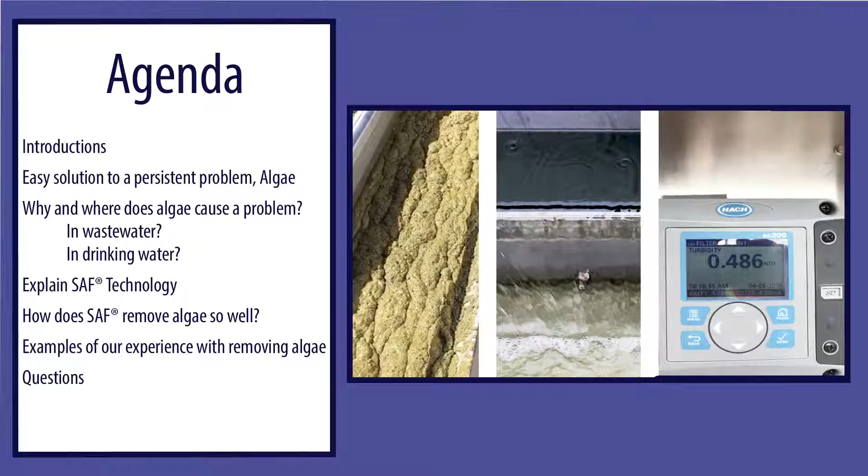But so our topic this morning is easy solution to a persistent problem, algae. And so what we're going to do this morning is talk about what is that problem, talk about in both drinking water as well as wastewater plants, what kind of problems that we've seen. And of course, as John said, if you've got any questions about that or have specific problems you've encountered with algae, please send that to us through the chat feature.

And then after we define that, we're going to be talking about SAF technology, how it works. And then we're going to be talking about SAF as applied to algae. And we'll be going through some case studies and hopefully have some informative things to share with you. So, John, let's talk about algae.

Okay. As I said, both wastewater and drinking water plants tend to struggle with algae. And often I'm at conferences, as I'm sure you probably are as well, and this seems to be a recurring topic. It's creating problems with other technologies that are out there. And I always, at those conferences, wish I could stand up and tell people about SAF. So I guess now's our opportunity. So let's first talk about just what are those problems? What have you seen, John?

Well, algae tends to float and sink, so in the use of clarifiers, it can be problematic. So, mostly on the municipal side, even on the industrial side, it has to do with treating the water, treating the BOD. On the municipal side, the water is often in a holding pond after it's been treated. It has some residence time there, and they're waiting to reclaim it.

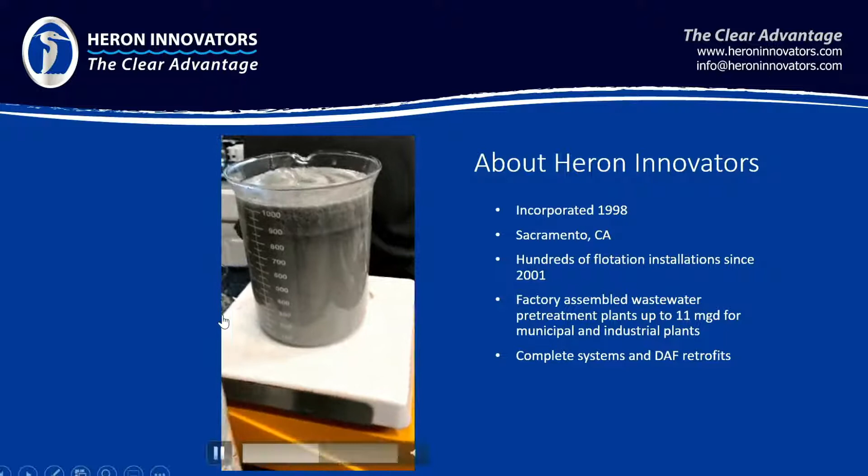So what you see is there's a charged micro froth, charged microbubble froth being injected, and those bubbles are attaching to the solids, getting a very high removal rate, very fast rise rate, and a very stable float. And that caught our attention. I had both the lab manager as well as the... and I think he said, wow, that was really something. And he started looking into SAF.

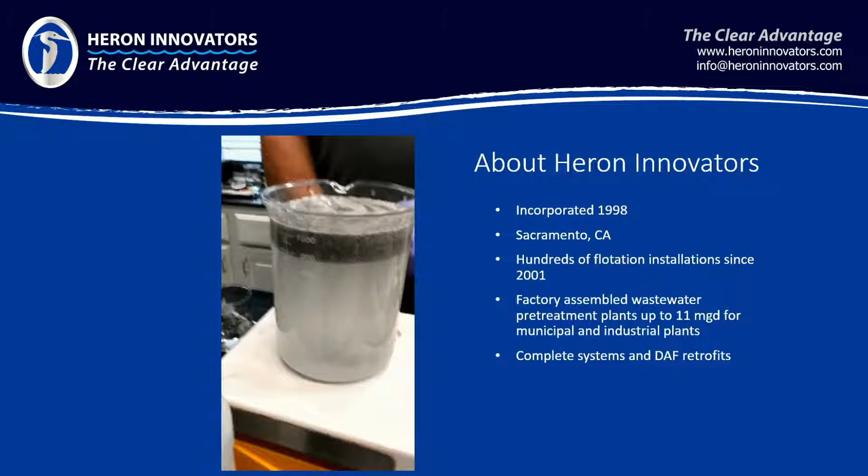In fact, visited 3 installations, Missouri, I think we went to Dodge City, Kansas, and we also went out to Fairfield, California, where SAF was installed, and really were impressed with what we saw in that particular plant. In fact, now owns 9 SAF systems. They've converted most of their DAFs over to SAF now. That's a big part of Heron's business, is converting DAFs to SAF, but they also own a lot of new SAF systems too, which we may get into a little bit more here.

So let's start defining how SAF actually works. You know, at first glance, this is just another flotation technology. It doesn't appear to be a whole lot different than dissolved air flotation. If you were walking into a room and looked at it, you wouldn't know that you're really seeing a different technology, because they're both flotation. You've got a big vessel sitting here where you're floating solids out of water. So I'm going to start off defining. When you really dig into it, it's a very different technology.

Recirculation system typically, where you're drawing from the underflow, and that's theoretically where the water is cleaner. So you're pulling from the underflow with a recirc pump, pushing against back pressure, injecting compressed air. Under pressure, air dissolves in water up to the saturation point. What that saturation point is, is basic physics. The temperature, pressure, all that's going to affect how much air you can squeeze into that water.

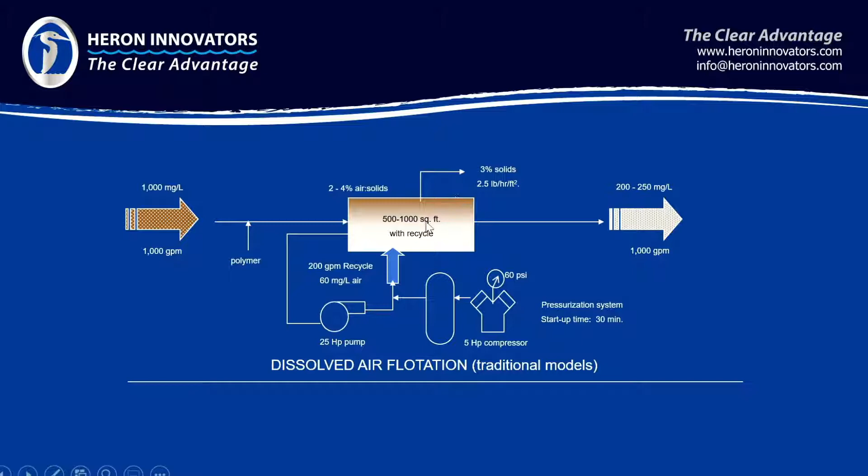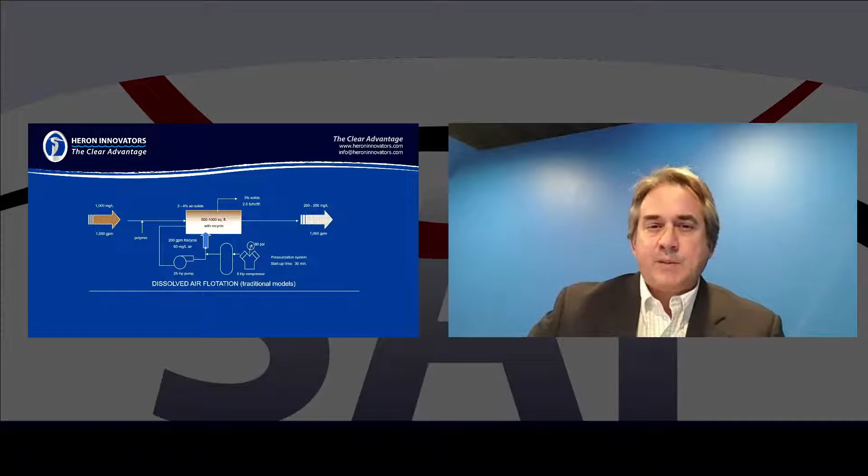The technology's actually been around for over 100 years. Of course, over that time, there's different ways of sparging in more air. They're all creating bubbles in the water. There's really nothing special about that bubble. And I'm going to ask John here in a minute to talk about those bubbles. What makes SAF bubbles so different from DAF bubbles? In fact, that froth. So what DAF doesn't... it

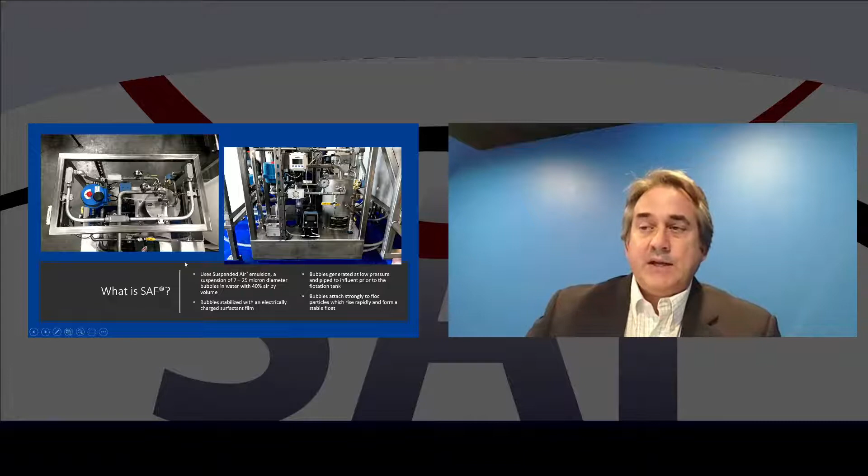Instead of making bubbles the way we just described, it's going to create a charged microbubble froth with a froth generator. And this sits somewhere in the vicinity of the flotation cell. It's a small unit, about 4x4, 4x6 foot footprint, depending on the size of the application. But a really small unit sitting somewhere nearby, and this froth is going to be 40% air by volume. With the DAF, we're talking about 2 to 4% air at most.

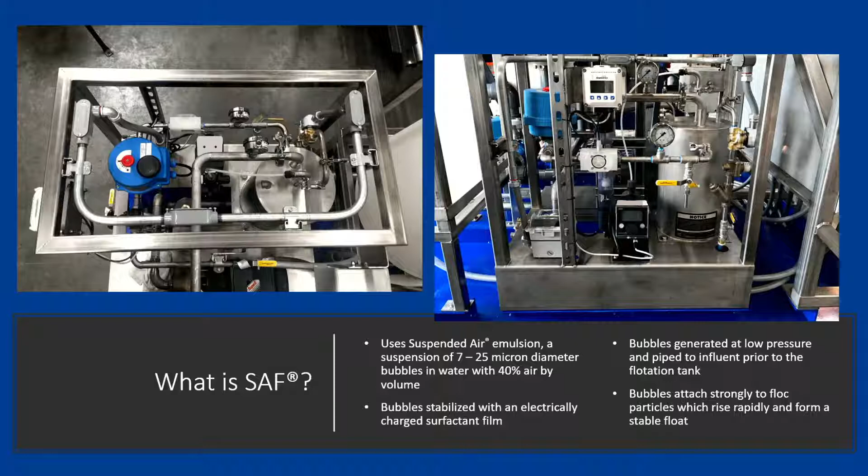But this is 40% air, and these bubbles are 7 to 25 microns in size, which is a much smaller bubble. They resist coalescing, but these bubbles, as I said, are much different than what DAF bubbles are. And so, John, why don't you talk about that a little bit? What makes SAF bubbles so much different than DAF bubbles?

Well, SAF bubbles were actually patented in the 70s, called Aphrons. They're used often in the mining industry. The whole process, in the 70s when it was patented, was supposed to scale into this DAF application. That's actually what we brought to the table. In the 90s we learned how to scale this. The original inventors actually all passed before the technology was ever used.

The bubble itself is a double-walled surfactant bubble, and it doesn't coalesce readily, which is very helpful in these water treatment applications because the bubbles remain in solution for minutes, available for use by solids, right? The surface tension, we have a surfactant on the outside of that bubble, a surfactant sheath, and that gives us surface tension advantages over a DAF bubble.

So that actually overcomes the surface tension of the particle, binds the particle just far more readily. In addition, we have electrostatic attraction properties. We can use a cationic or anionic surfactant to bind the particle. There's almost always the need for a cationic charge. And that binds the particle tightly.

We get a lot of air in there. We don't have the resistance to binding that a DAF bubble would have. And the bubble is 7 to 25 microns in diameter. It has a slight charge to it. It acts a bit like a coagulant on top of it all. So in the video, if you look closely in that jar test, you actually see when we added the froth how that particle just puffed up, right? And it actually flocculated or coagulated in addition to what polymer and coagulant had done before us.

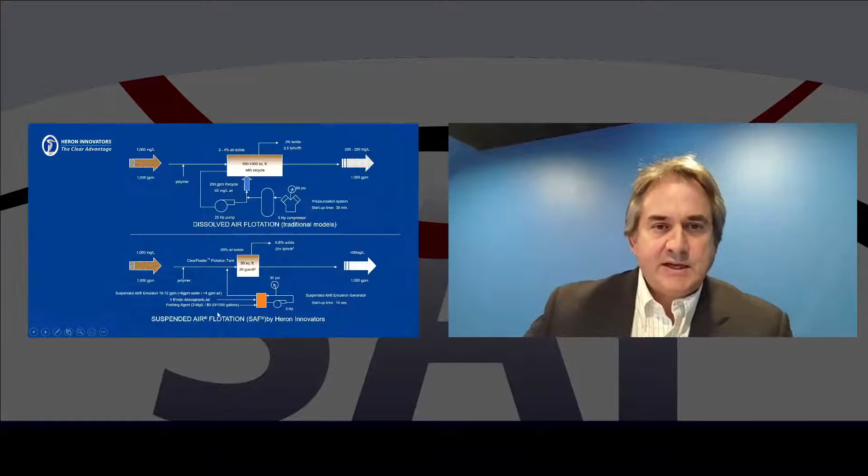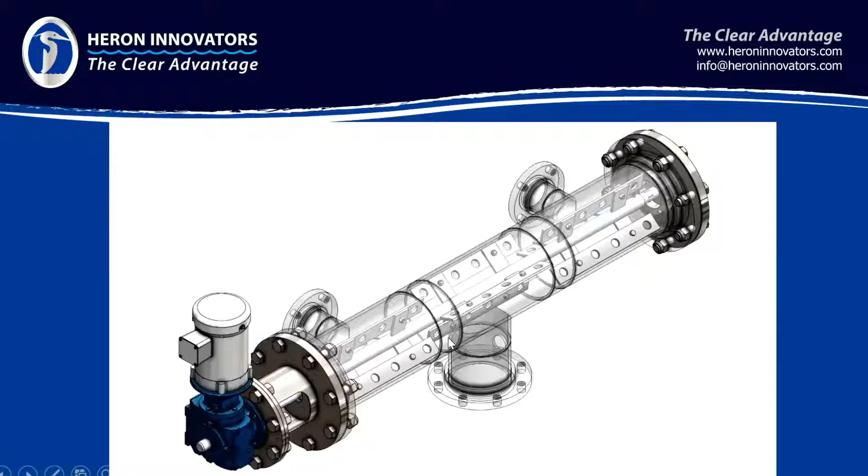Yes. We're there. So the froth, here's the froth generator, and that's where we're making those bubbles. They're actually injected ahead of the flotation cell, and they're going to be stirred in ahead of the flotation cell. So different from a DAF where air is continually being fed to keep that solids blanket suspended on the surface, there's going to be no more air injected after we put it into here because the bubbles are actually attaching to the solids. In fact, this shows we've got a mixer that will be in front of the flotation cell.

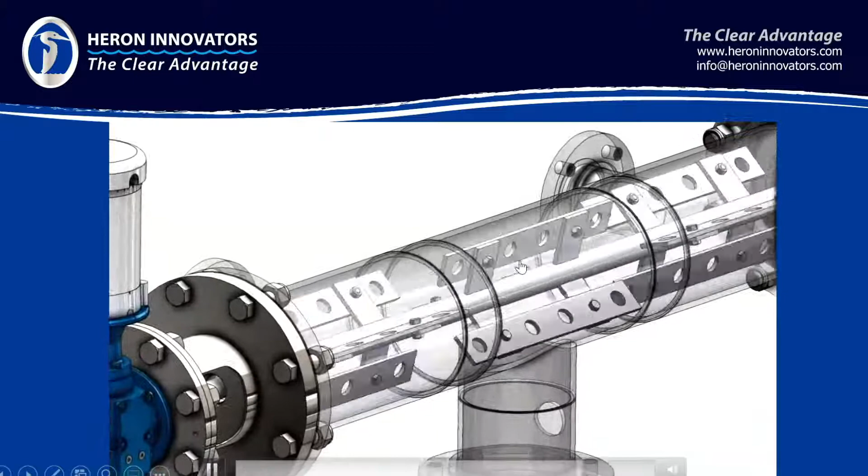So the froth's injected here, these bubbles are going up with the influent and being entrained and gently stirred in with this paddle mixer. Of course, this drive is VFD controlled. It's probably turning at a rate of around 10-15 RPM. So very gently stirring that in to get that air to particle reaction.

And the reason I keep emphasizing gently is because what we do not want to do is shear the floc that was created with the chemistry, which is actually one of the disadvantages of a recirculation whitewater system, because that pump will actually macerate the solids that were created previously with the chemistry. So starting up a DAF is much more difficult because of that reason, where this instantly we're making good froth. This system is up and going within just a few seconds of hitting a start button.

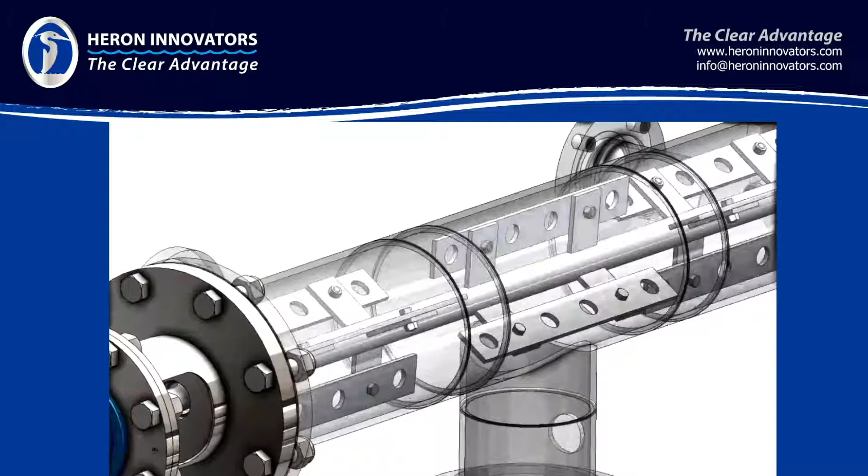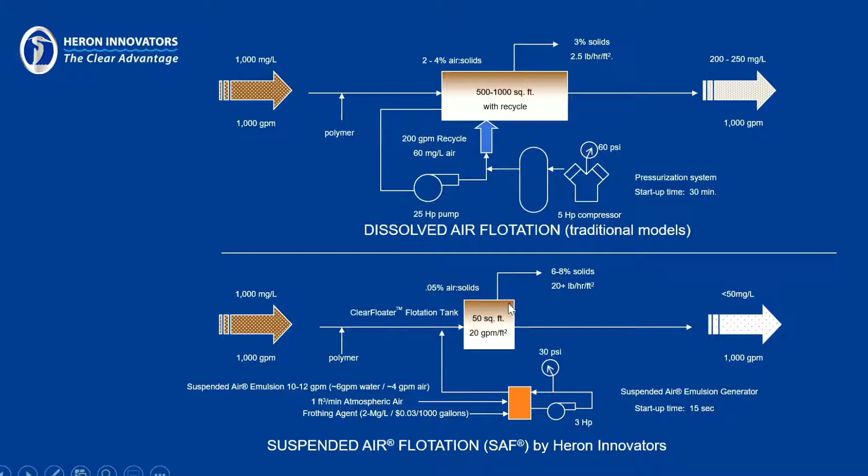So again, froth's injected into this point right here, and then it goes into the flotation cell where again you'll see that very fast rise rate, and it just creates a very stable float. And in fact, drier solids, right, John? Yeah, so the density of the solids is much less than you get in typical DAF applications or IAF applications. And that density creates, we have nothing like a rag layer, right?

The solids are formed, they float right to the top, and they clearly sit above the water, which makes them perfect for draining, right? So they drain water, and we get very close to meeting paint filter tests all the time in our solids. They also have, maybe a little bit of a sideline, kind of a gelatin property to it when they come off, and with that property, it really serves downstream dewatering well.

We release from fabrics really well. We have a fluid component to it, even though it's very dry, for like screens and so on and so forth. So downstream dewatering oftentimes does far better with a lot less chemistry and a lot less maintenance, given that the solids have come from our process.

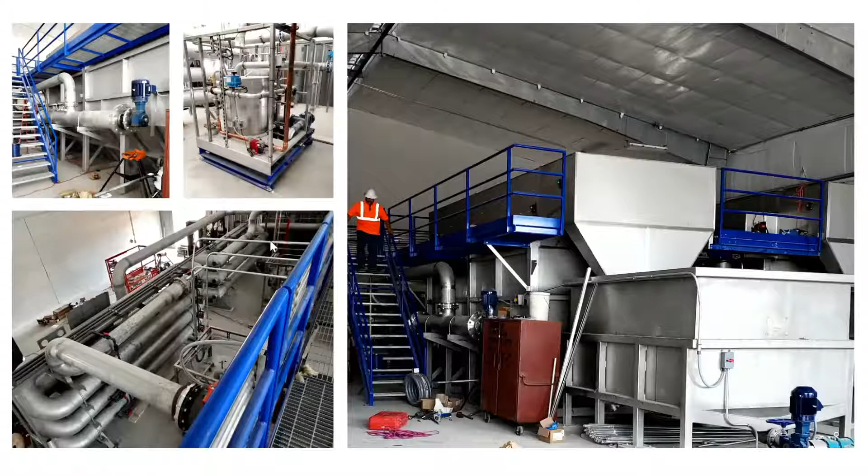Yeah, in fact, John, I've got a few pictures, getting away from the diagram. Let's look at actual SAF systems. So if you would, walk us through what we're seeing here. Yeah, so the screen I'm looking at is a little bit above the camera, so if it appears to you out there that I'm looking over your head, I'm actually looking at a screen I have here.

But on the top left corner, that mixer that Jeff was showing you earlier is actually there on one of our float cells, right? And so the water comes into the middle of that mixer, and it splits to the two nozzles that feed into the tank. You can see the gear motor there that's VFD controlled. The VFD, of course, is in the control cabinet, and that helps us to mix the froth, the micro froth, evenly and gently and as close to instantly as we can. Right? On the right side is actually the SAF generator, and that's our secret sauce, right?

That is a proprietary piece of this whole thing. That unit is able to deliver 7 to 25 microns at whatever flow rate you want, as long as it's within the spec of the unit you purchased. So there's just actually like a diaphragm valve, like a water valve there, and you can send more air to the process or less air to the process.

In addition, water level in that can is maintained through a float switch, and frothing agent feed to that can is maintained by the flow meter, right? So it's pulse fed from the flow meter feeding froth out. So really, the difference between a lot more air and a lot less air is just turning a valve. Everything else adjusts itself.

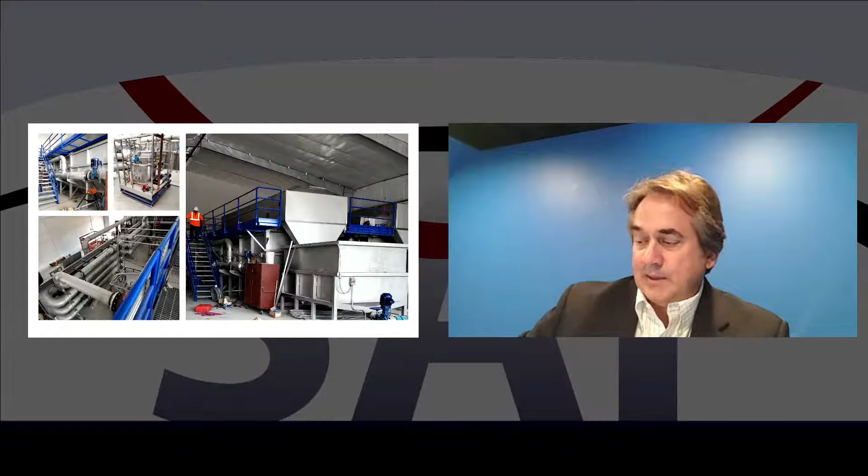This plant, as I said, they do a secondary gravity decantation where they've got a ball valve they'll just crack open every few hours. And then, after they decanted it, the solids pump sends it on its way. So let's talk about algae.

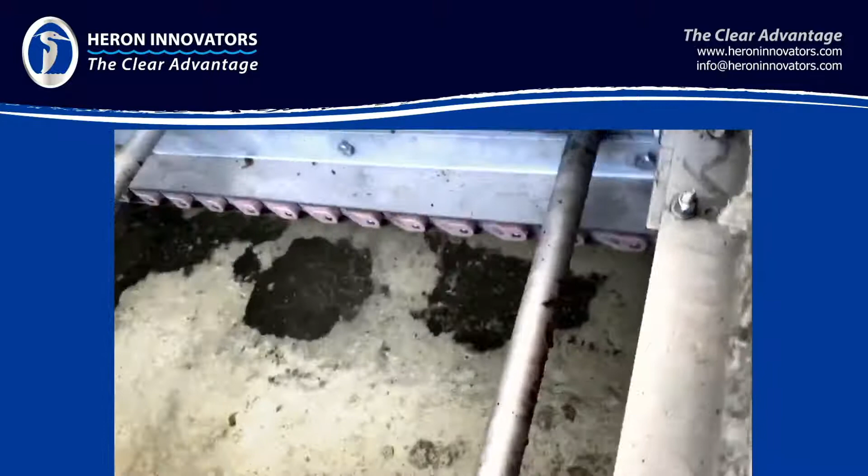And this video was actually shot just a few months ago at a trial that was done, I think, in Northern California, right, John? Yeah, it was. It was in City of Colfax, right? Yeah, so that's algae. It's growing in primary water, Jeff. So that's one of the applications I didn't actually talk about.

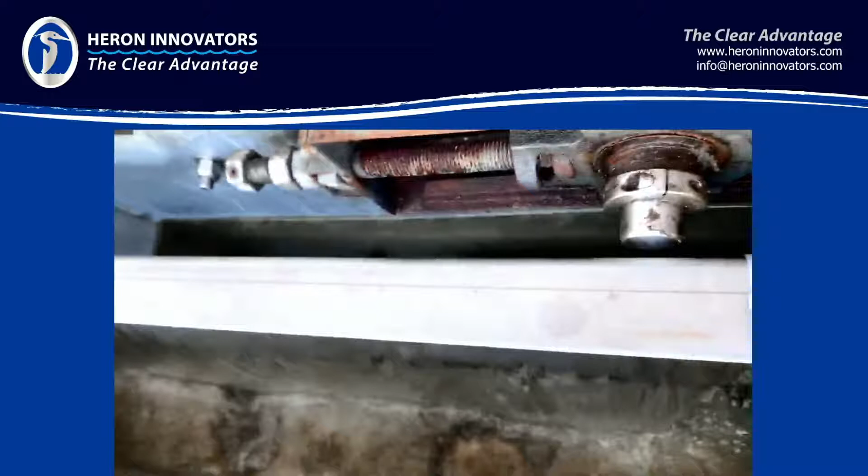But a lot of these sewer plants, when they have high flow conditions, get a lot of infiltration, and it exceeds the hydraulic capacity of the wastewater treatment plant. And so the water is diverted into a pond, basin, EQ, a number of places. But those places almost always are open to sunlight, and they grow algae. And so it becomes very difficult for the plant to receive that and then send it to the process. So it's helpful to pre-treat it. And that's where we come in.

Right, and we've done this in a few plants. It works very well. What kind of numbers were you seeing there? Turbidity levels? I believe it was right around 1 NTU, right? About a half to 1 NTU. I got to go back and look. But it was pretty low. It was very low, and it certainly was low enough to be incorporated into the rest of the plant without concern.

Yeah, I just thought I'd also mention, John, when I first started talking with you years ago, you were just kind of finishing up some pilot work that you did with some startup companies that were trying to take algae and convert that to biofuels. I know there was a number of those a number of years back that were trying to, as I said, make fuel from algae. And even though that industry maybe wasn't quite so successful, I think the pilot work you did, the numbers I remember you telling me were pretty impressive. Do you remember any of those?

Sure. Well, we did two of them, and were involved in two of them to some extended degree. One was in Daphne, Alabama. We were actually there for a little bit over 2 years. What that project was is they were inoculating primary sewage with algae, and the water was being sent out to 6,000, then later 10,000 gallon bladders in the bay. The sunlight would grow algae. The algae would oxygenate the water, degrade the primary solids. That would be pumped back to the plant on shore, and we would harvest that algae.

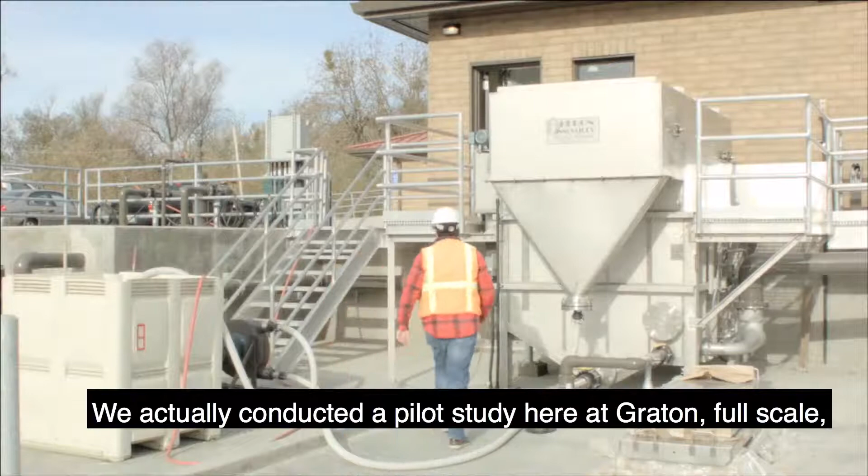They inherited some problems, one of which is Graton would not be allowed to continue to discharge into the Atascadero Creek. We actually conducted a pilot study here at Graton, full scale, and we proved to the state that we could get the required removal of algae and bacteria from the water with a SAF to get turbidities down in the 10 range or lower.

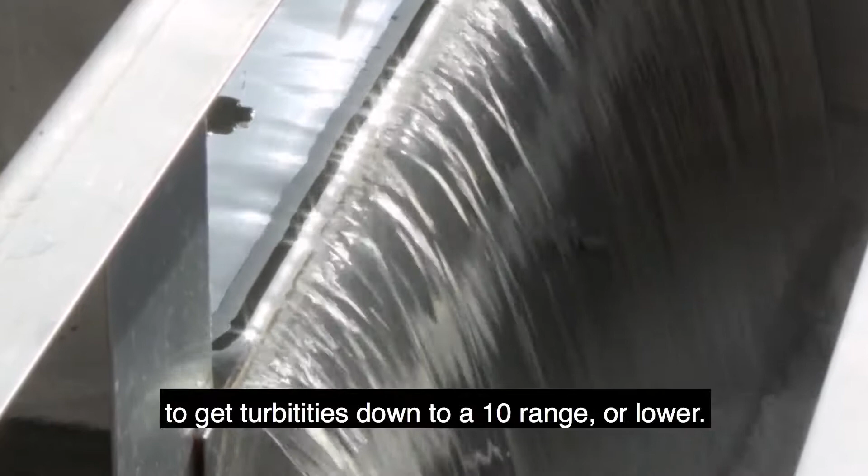Pete Lescure and I were working with the district to try to find alternatives to going to this activated sludge or regional system. With the lead designers on this Graton wastewater project, I was convinced from the viewpoint of the principles that whereas a DAF, you have to backtrack, recycle 50% of what you're trying to produce, the SAF only has to use 2% of that flow. So that means a whole lot less pumping you're doing. That's a whole lot less material handling you're doing, smaller pipes to deal with, etc.

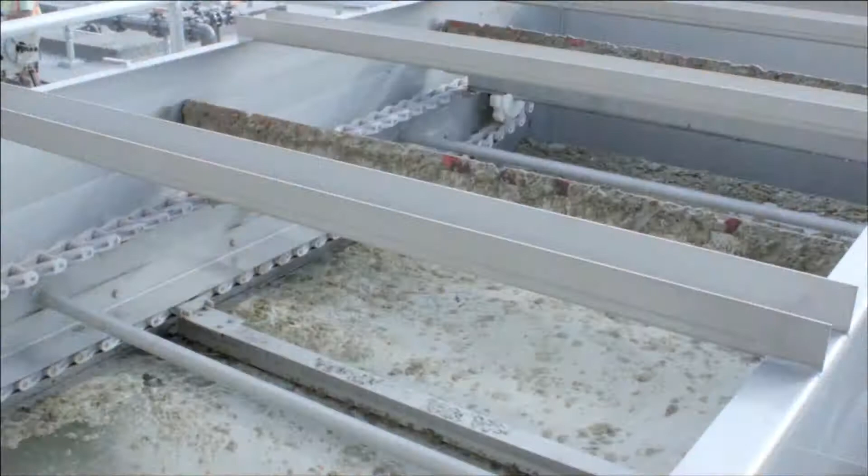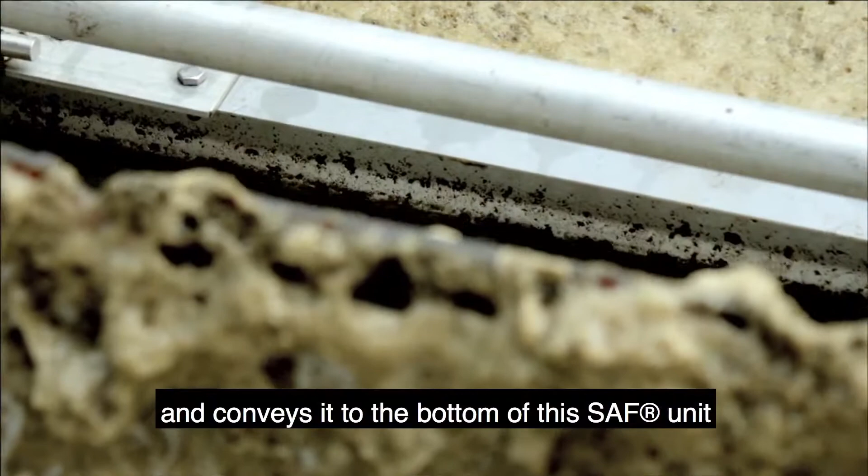The SAF unit takes water from our ponds and adds coagulant to it in this mixing tank and conveys it to the bottom of this SAF unit where a surfactant and air are entrained and cause the algae and bacteria to float to the surface.

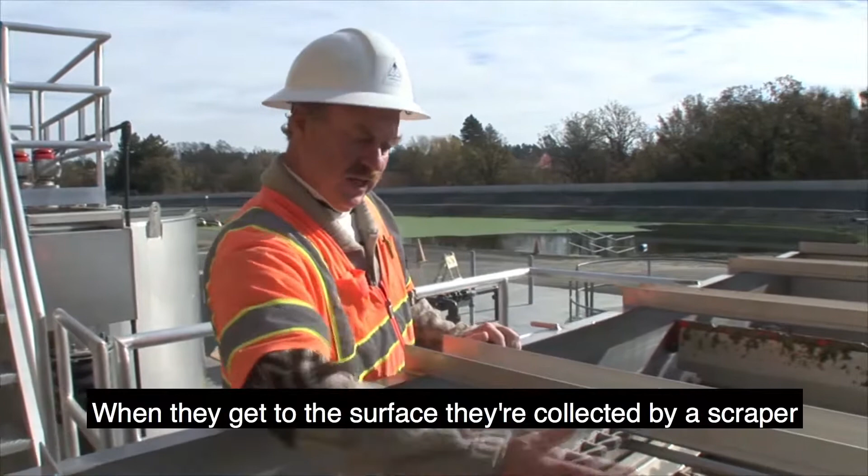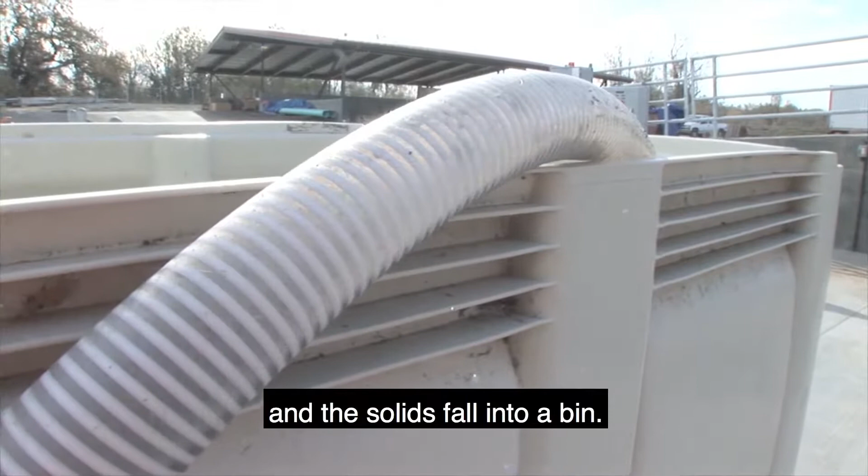When they get to the surface, they're collected by this scraper and carried all the way to the end of the DAF unit where they are brought up on a beach. The water drains off and the solids fall into a bin. The bin then is dewatered by gravity and it is composted.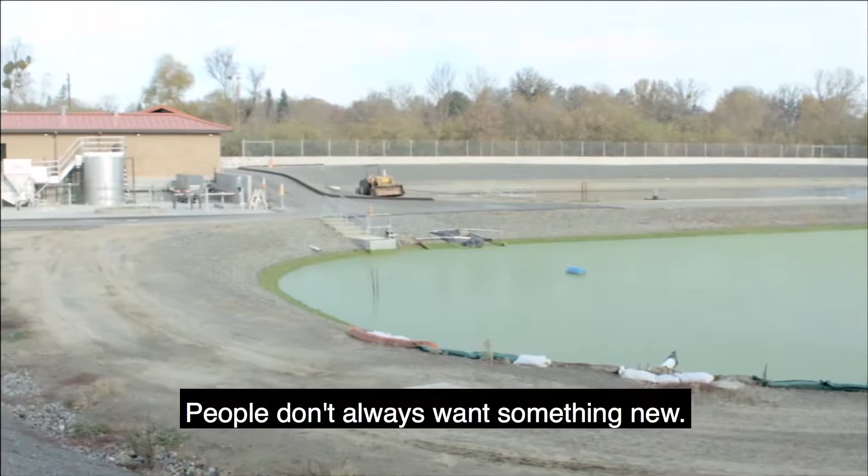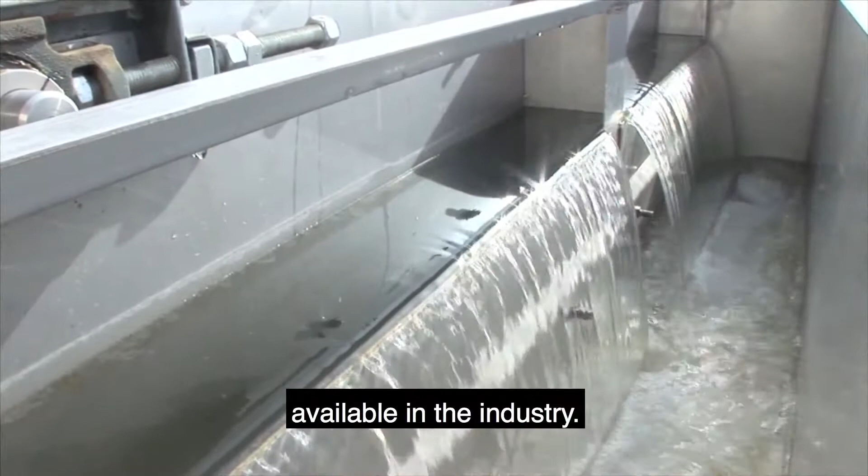People don't always want something new. Do we need to continue with things that were developed in 1911 that are shown to be less efficient than things that are now available in industry? I believe not. And we'd like to show them it's okay.

Yeah, so Grayton was one of our first algae projects. We did a trial there and we achieved numbers that no one knew could be done with a flotation cell. So it turns out to be a pretty useful video for us. We've come a long way since then, and our processes are better, more automated. But the fundamentals of what we use there are the same we use everywhere else. So I'm going to turn this back over to Jeff.

Yeah, I think so. Grayton's a great example. That's a system that's been running a number of years. Pleasant Valley State Prison is another, right? That's correct. And so that's a newer system. That went in a couple of years ago, I'm going to say 2018, 2017. And that, again, we duplicated that really low polymer and chemical consumption. But we did a few things a little bit better. And so it's not too hard to achieve drinking water performance in that unit.

And the sites, like most sites, they just think they're so easy to run. The operators love them. So we had an operator at another site just recently, Jeff, as you know, say these things are stupid easy to run. They are, and if you're playing with it and it falls out of specification, it's just so easy to get it back, and it gets back quickly, like in minutes, not hours or a day, right? So back at you, Jeff.